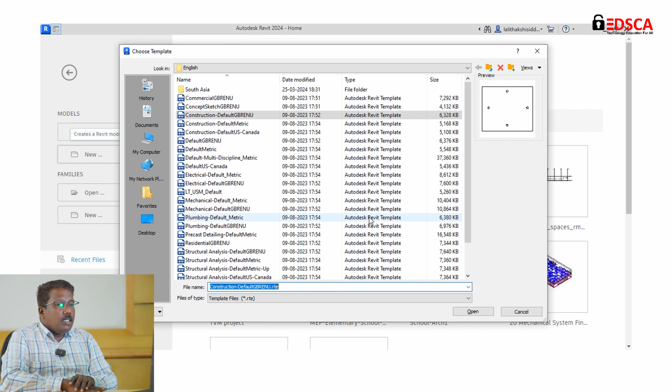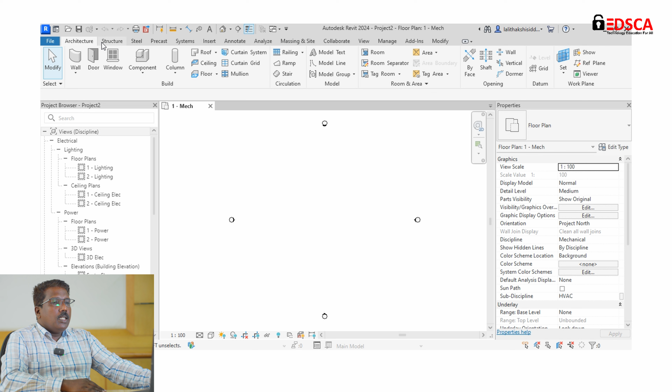And as I mentioned earlier, only after completing the architectural design and also the structural design is the building services design starting, and we always request the BIM model created in Revit software to start with the design in Revit software. Here when we hover through the features of Revit software, we could see that architectural tools are available under the tab Architecture, and the Structure tab refers to the structural design features.

And for designing MEP systems, we have got one more tab which is named Systems. When you go through that, you can find the HVAC panel is available, plumbing design is completed with the features under the Plumbing and Piping panel, and electrical design is completed with the Electrical panel, which has all the tools for creating electrical designs.

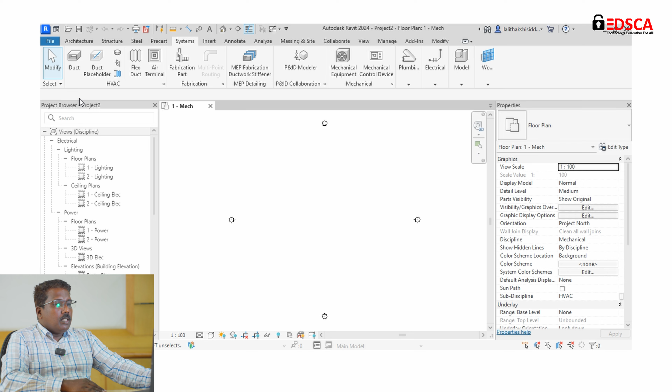Okay. Now I would like to open one project to showcase how the design will appear once you complete the design for a building. So here I am opening one project. Right now I have opened a file which has all the systems completed. So you can see that HVAC systems are available here.

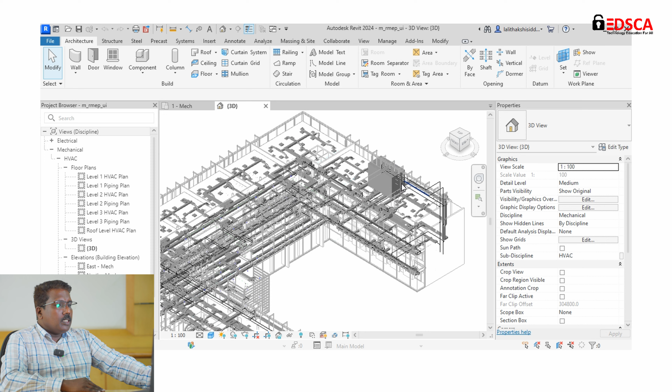So this is the equipment named air handling unit, one of the main equipment in the HVAC system. And here you can find the chiller unit which supplies the chilled water to the HVAC system. All the designs are done as per the heating and cooling load calculation, and the HVAC heating and cooling load calculation is available in Revit software.

Now let me show you the circulation network for the HVAC system. So I am selecting; see, this is the HVAC main duct which starts from the air handling unit, and it circulates to all the levels or floors with its network connection. And these connections and duct sizes are done according to the calculation provided by the heating and cooling load calculation features. Okay.

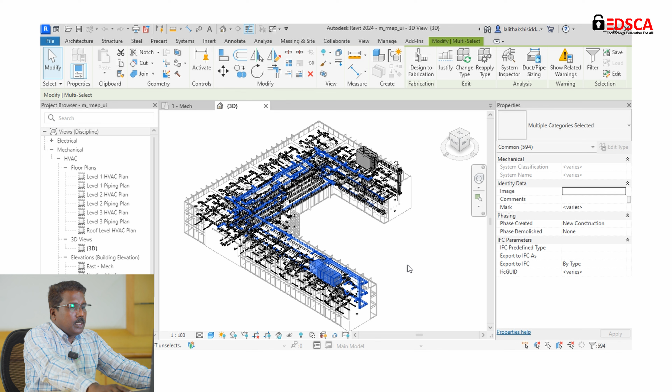Now let's have a look at how it looks in the floor plan. So I'm opening the ground floor HVAC plan here. Now you could see that there are three types of duct network with three different colors. One is blue, which refers to the conditioned air supply. The return system is noted with magenta, and the exhaust system is noted with green. So these are the different systems, supply, return and exhaust, in HVAC design.

Now how it is designed is that, as I mentioned, we have got a heating and cooling load calculation tool which comes here in Analyze. When you go for heating and cooling load calculation, Revit will calculate all the heating and cooling requirements inside each room through space creation. So these are the spaces which we are seeing in green color. That is already calculated here.

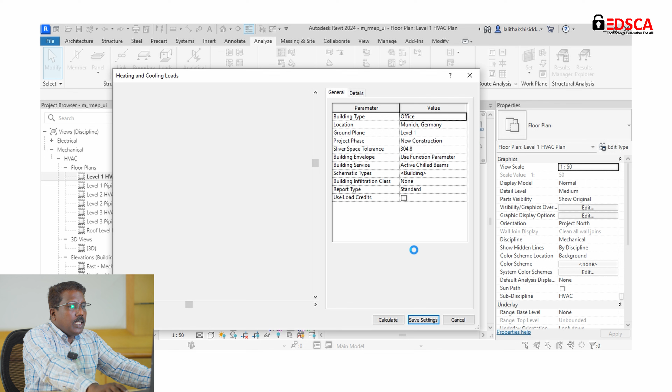When I select the space, we can see how much conditioned air is required. So this is 703.34 liters per second. And Revit is so intelligent that if you remove any item from the system, it will automatically update. Here it is showing that we have provided 875.00 liters per second actual supply, and when I remove one of the diffusers, that quantity is not being supplied, and it will update automatically. That is the efficiency of BIM technology.

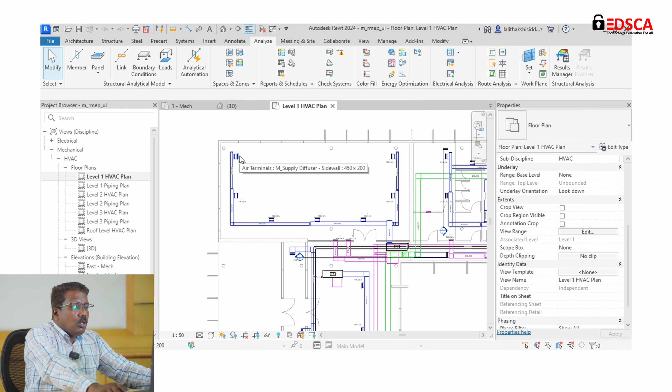Now you could see that it's showing 750 liter per second. So likewise, all the designs are always coordinated with information inside the software. Okay. Now after completing the design, we have got the facilities for creating all the schedules and quantities as well as all the features of drawing, etc.

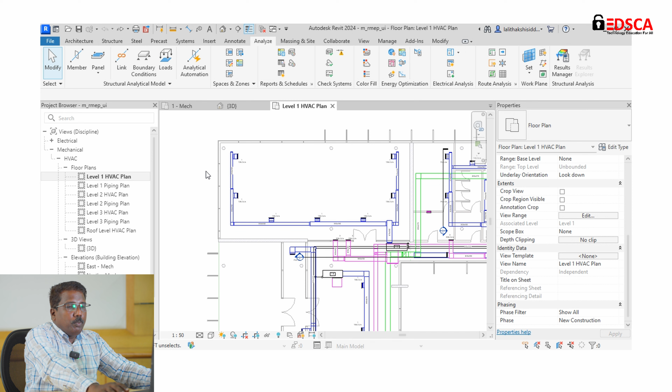So when I open the sheet here, if I want to create the sheet of this particular floor plan, I can just go to the sheet and I am going to create a new sheet here. And if I want to show the ground floor HVAC plan, I can just drag and drop that here. I want to make it in 1:100 scale. So let me change the scale of that one to 1:100 scale to fit into that particular sheet.

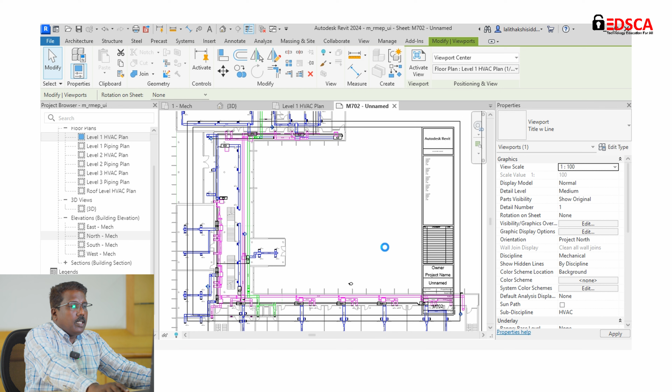Now it is fitting, and I can drag it to make it proper inside the sheet. And this can be taken for the printing. So this is how it works. Now when we go to the electrical design, we can find that electrical calculation is also possible.

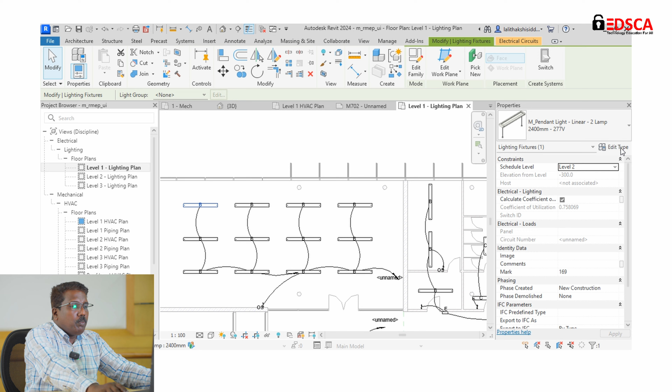When I go to the electrical data, I am just opening the ground floor electrical plan. So here this is the ground floor electrical plan, and here also you can find that all the lighting fixtures are created already, and each lighting fixture is efficient to show its physical characteristics. When I open this one, we could see how much lux it is contributing inside the room. When you go to the properties, we could see that it is having 150 watt, 84 lumen per watt is the contribution it is giving to the room.

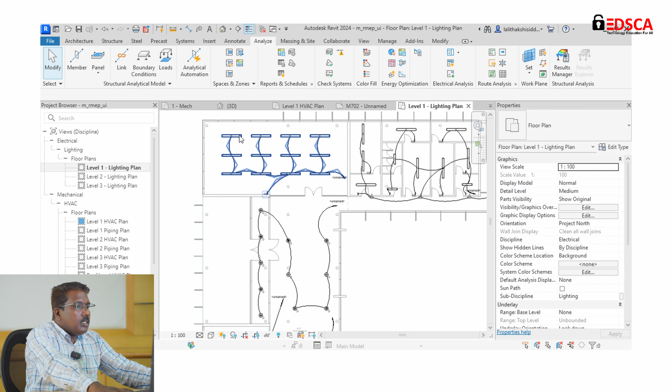Now, if you want to identify the total lighting inside the room, you could select the space and we can see that it is contributing 645.25 lux there. As per the standards, we can do all these details, and all the connections from each lighting equipment to the panel are already done here. When you highlight that one, you could see that this is connected to the panel. Now, this system has a rating of 20 amps, and the apparent load is 900 VA. Like that, all the details we can extract from the software itself.

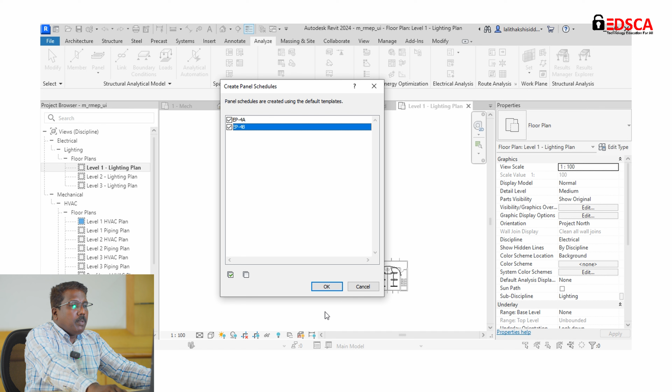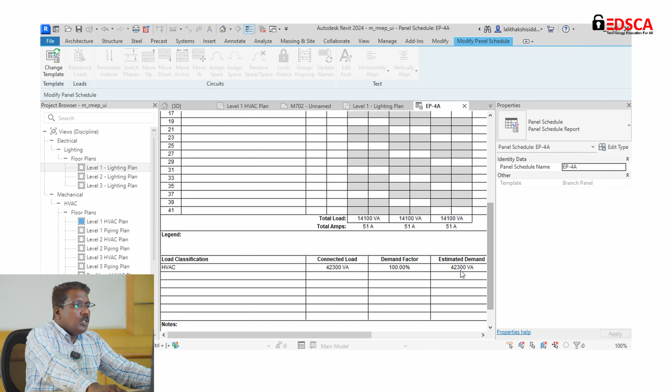Once you complete the electrical design, if you want to create the panel schedule, that is also possible. I can go to the panel schedule. So, LP1, EP4A and EP4B are the panels here. When I open the panel schedule, you could see that the EP4A panel is having a total connected load of 42,300 VA, and the demand load is the same, 100% demand is noted over here. So likewise we can prepare, and just like previously I have shown the sheet creation, we can also create the sheet of this electrical design.

Likewise, we are doing the plumbing design also with the tools available here. As I have shown here, all the plumbing tools are available: pipe creation, pipe placeholder and plumbing fixtures. Everything is available to create the plumbing network. So with that, all the features in Revit software are efficient to create all MEP designs.

And if you want to prepare the fire protection network, that is also available. When you go to the plumbing system, we have got the sprinkler feature. With that sprinkler feature, we can create the fire protection network, and we can calculate and complete it very efficiently. And if you want to prepare a communication network, that is available under the electrical system. We have got all the communication devices over here, and with that we can prepare all the communication network.

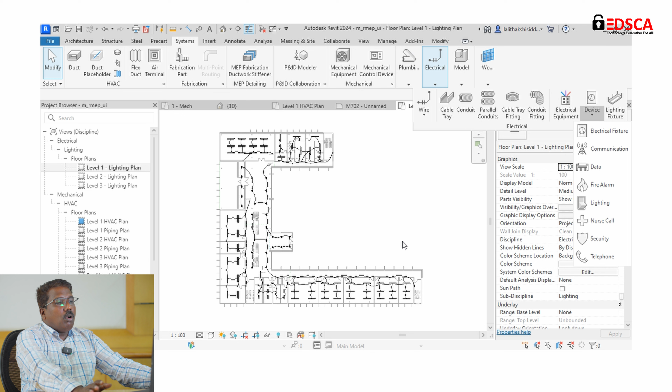So, with Revit software, we can complete all the MEP solutions like mechanical systems, electrical systems, plumbing and piping systems, and also any kind of communication network plus fire protection system. So, I would like to tell you that Revit software is always used efficiently in the industry, and it is very efficient for MEP design.